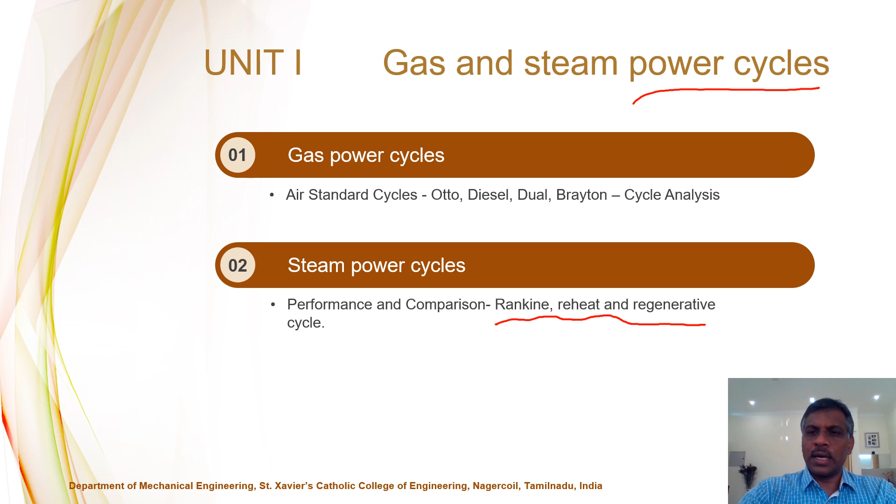Coming to air standard cycles, the basis of course goes to this most efficient cycle. It's an assumption, an ideal cycle. It's better to have that way, but there are a lot of practical difficulties in implementing the Carnot cycle. The Carnot cycle, if you review it, has 4 reversible processes. When it is reversible, it is very tough, but it is easy to remember this Carnot cycle in a TS diagram, temperature-entropy diagram, where it looks like a square. It is easy to always remember the Carnot cycle because that is the base, the best we can achieve—an ideal cycle for all power cycles.

There we have, as I mentioned, 4 processes: isothermal heat addition. Isothermal means constant temperature heat addition. You can see from 1 to 2, and it is horizontal in a T-S diagram. That means T1 equal to T2.

The second process is expansion, where we will get work. It is expanding, and it is isentropic, otherwise called reversible adiabatic. Isentropic means entropy is constant. In process 2 to 3, S is equal to constant, that means S2 is equal to S3. You can see it's a vertical line, so S2 is equal to S3.

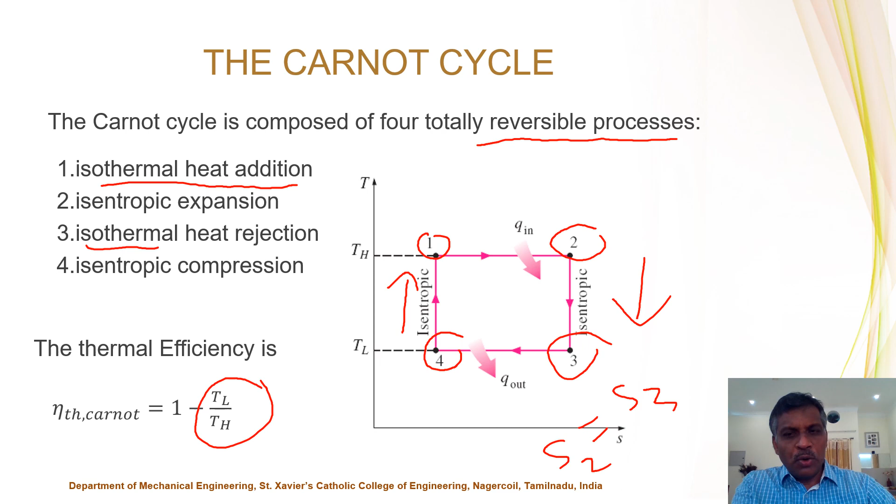So when it comes to air standard cycles, basically we assume air is the working fluid. As you know, air cannot be a working fluid for actual analysis purposes, but for theoretical analysis of IC engines, internal combustion engines, to derive theoretical equations for how the performance of the engine varies, we assume air standard cycles.

So you can see that in the actual case, actual IC engines, we supply air as well as fuel. Fuel may be either petrol or diesel or a gaseous fuel. You supply air as well as fuel to the combustion chamber, and it generates a lot of heat, and it expands, producing power, and the combustion product has to be thrown out to the atmosphere for taking fresh air and fuel for the next cycle. This is the actual case.

But our standard assumption is that we take only air, eliminating the fuel, and we are adding heat. Instead of combustion, we say that we are adding heat and air goes back. This is ideal in the sense, this is our assumption for air standard cycles. So instead of actual air and fuel, we take only air. Instead of combustion, we take heat addition. Let's see how it is.

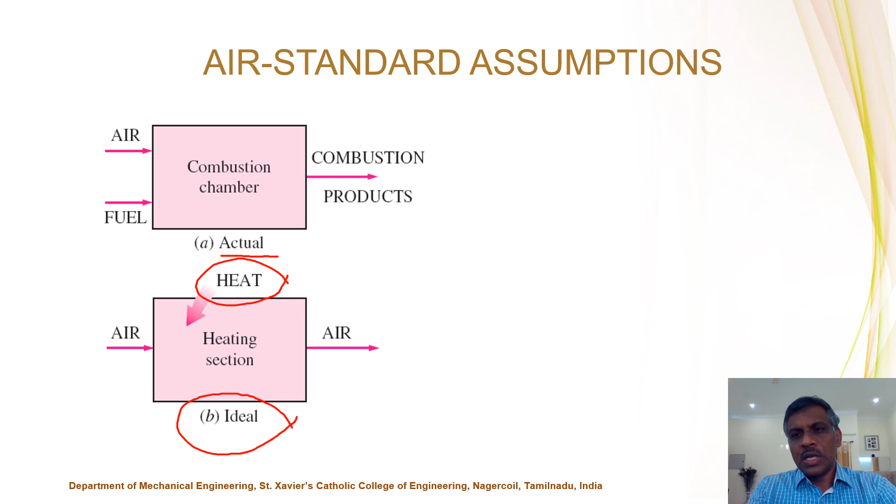So the basic assumption is we assume that the working fluid is only air instead of air plus fuel. And we assume that the air behaves as an ideal gas, which is why we can apply gas laws. And again, we assume all the processes involved are reversible processes.

You know how difficult it is to have a reversible process. A quasi-static process is a reversible process, a no-friction process is a reversible process. But we assume it as a reversible process. As I told in the previous slide, the combustion process is replaced with heat addition, and the exhaust process is replaced by heat rejection.

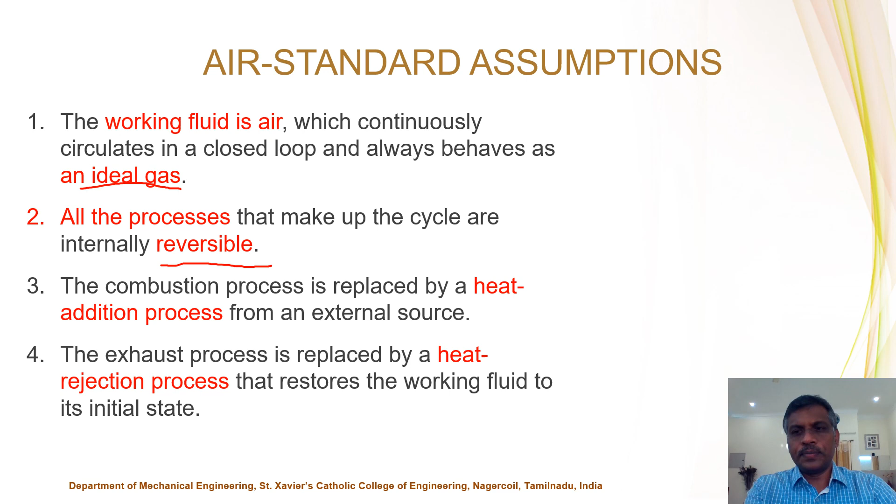Just to get a grip of it, we talk about reciprocating engines or IC engines. You know the major components are an intake valve and exhaust valve, and you have a cylinder and a piston where the piston can move up and down. The linear movement of the piston from bottom dead center to top dead center, we call it a stroke length, or stroke in short. The diameter of the cylinder or the piston, both can be called the bore diameter, or in short, the bore.

You can look at this diagram. Here you can see that as the piston moves from TDC to BDC or BDC to TDC, that volume is called the displacement volume, which we calculate as the cross-section area of the piston into the length of stroke. We say it is pi by 4 d square into L.

And you can see another term, which is also better to get familiarized with, the clearance volume. That is, when the piston has reached the top dead center, there is still a gap to accommodate the compressed air-fuel mixture, as well as the parts of the valves and other things.

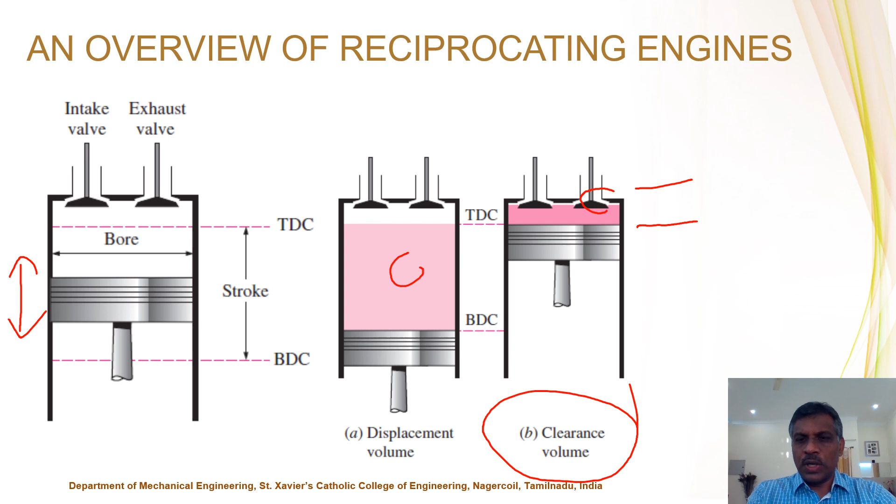So that volume we call it the clearance volume. These are the basic nomenclatures of ICs.

So Otto cycle, we'll call it the gasoline cycle, or petrol engine, which is otherwise called spark ignition engine, because the combustion is started by giving a spark. That is why we call it a spark ignition engine. Let us assume it is a 4-stroke SI engine.

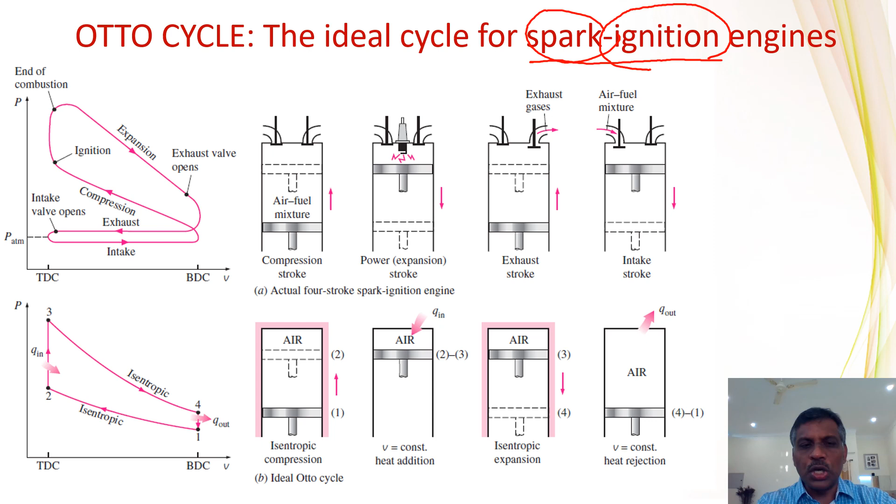In a 4-stroke SI engine, the top part is the actual case, and the bottom diagram talks about the ideal one. This is ideal and this is the actual.

Let us see the actual first, then come back to the ideal Otto cycle. Air and fuel are taken into the cylinder, and the piston moves upwards from bottom dead center to top dead center. Both the valves are closed here. And the air fuel mixture gets compressed.

Once it is compressed fully, a spark is given by the spark plug. Combustion starts. Expansion of air fuel takes place. It pushes the piston downwards. That is what we call the power stroke, or expansion stroke. Piston moves from top dead center to bottom dead center.

Okay, expansion. So initially we compress, giving work to compress it. Then we combust it, burn it, then expand it. And the remaining is the exhaust. We throw off all the burnt gases to the atmosphere, and the next cycle begins with the suction of air fuel. So this is approximated.

Assumed. You can see that intake and exhaust can be cancelled because they are almost in opposite directions. Intake is this direction, and exhaust is in this direction, so we can cancel it.

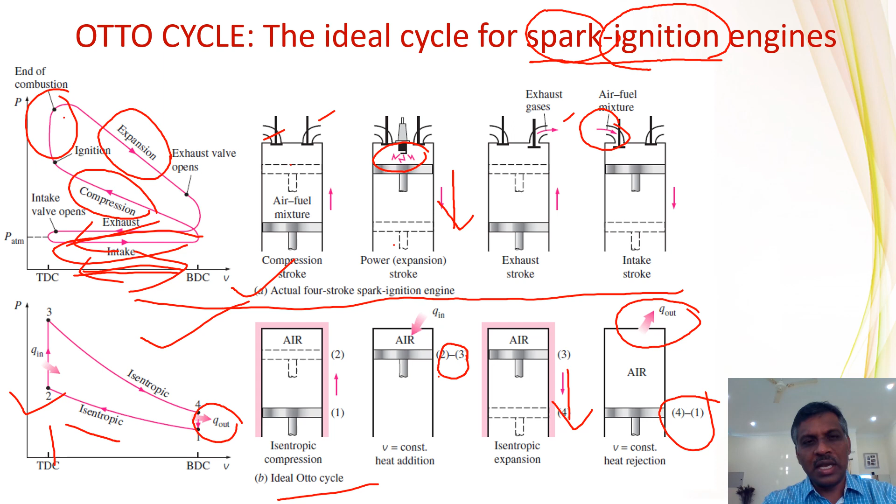Thank you. So this Otto cycle diagram, you should be able to draw it and remember it. Especially this PV diagram is very, very important. Here we understand it is constant volume heat addition, 2 to 3. This gives the name constant volume heat addition process of expansion. So constant volume is 2 to 3 here.

So we can see that V2 is equal to V3. That is why we call it a constant volume process. Here you can see it is V4 equal to V1. That is constant volume heat rejection.

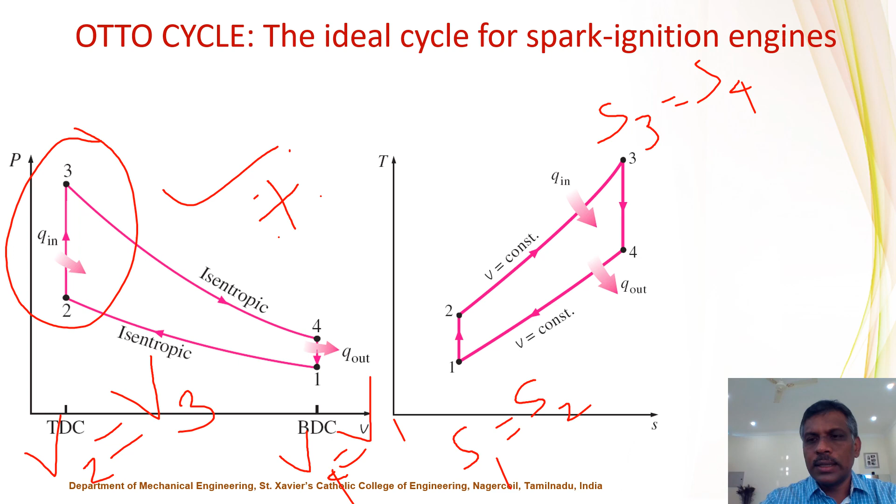Here, 1 to 2 is isentropic, so S1 is equal to S2, and S3 is equal to S4. This is what our PV and TS diagram of the Otto cycle is all about.

So the Otto cycle derivation is very important, very very important. They can ask this in the exams. So please recollect and study that. I'm not doing it here as a revision.

So the final equation comes as efficiency of Otto cycle equals 1 minus 1 by Rk to the power gamma minus 1. And Rk is the compression ratio, which is equal to initial volume by final volume.

It is the final volume, so in other ways we put it as V1 by V2. We say initial volume of the cylinder divided by the clearance volume left after the end of compression. From this equation you can understand that this term is very important.

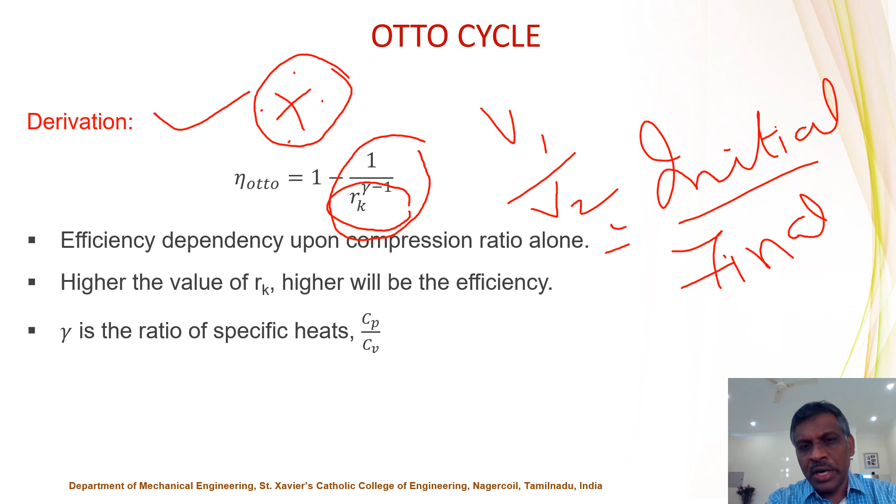In order to have this term at a low value, that is 1 minus something, the denominator Rk should be a high value. So higher the value of Rk, higher will be the efficiency. If Rk is higher, the efficiency will be higher.

That is the concept. Of course, gamma is the ratio of specific heats. So this is what we understand from the derivations: efficiency depends upon compression ratio, and higher the compression ratio, higher the efficiency.

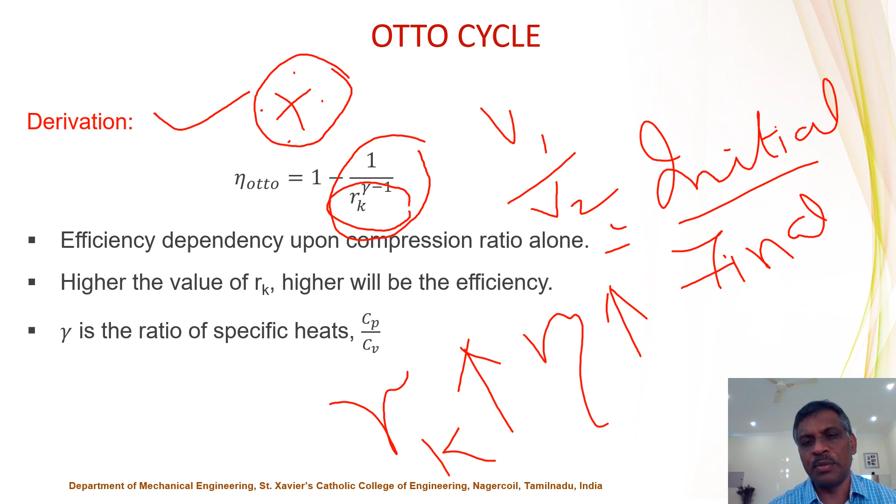But that has a limit. That is a theory portion in this unit, and they can ask it. So you say higher the compression ratio, higher the efficiency. So can we keep on increasing the compression ratio? That is a question that comes to mind. We wanted to improve efficiency, so let's keep increasing the compression ratio.

You know that Otto cycle compression ratios are low, around 8 to 12, whereas in the case of the diesel engine, because that is a compression ignition engine, it is around 20 to 24, which is so high.

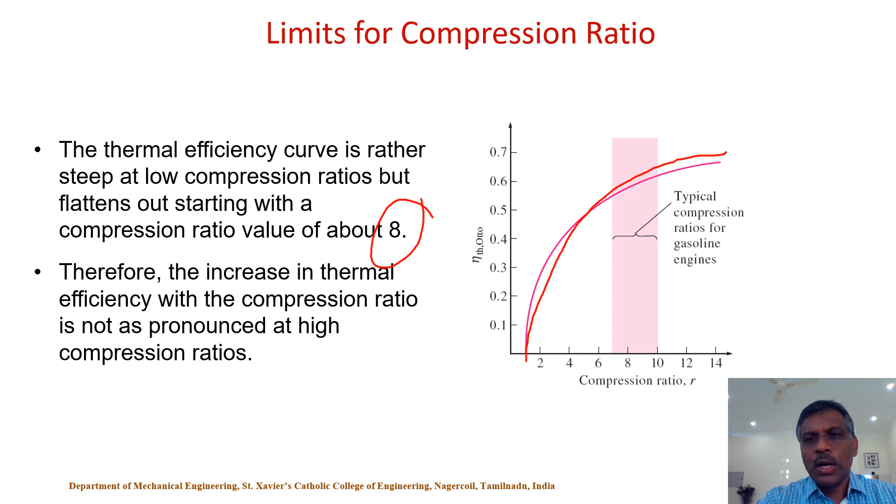We take the air-fuel mixture in the compression stroke in the actual case. If you take air and fuel together and compress it, the temperature will rise. And if the temperature rises above the auto-ignition temperature, automatically the fuel gets ignited, not in our hands.

Normally we ignite the fuel by giving a spark at an appropriate time. If the temperature goes high, it burns automatically, early, rapidly, and it creates a lot of noise - audible noise. It backfires. The piston, instead of moving forward, can return back, putting more load on the compression stroke. So this is called knocking, or auto-ignition, or detonation.

So this is abnormal combustion, different words. It is not normal combustion, it's abnormal combustion. So auto-ignition is not allowed. Auto-ignition cannot be tolerated because it hurts the performance and causes engine damage.

So there is an upper limit for the compression ratio. You cannot keep on increasing it. That is why the compression ratio for the petrol engine is low, it's about 10 or so. It is not increased as we like.

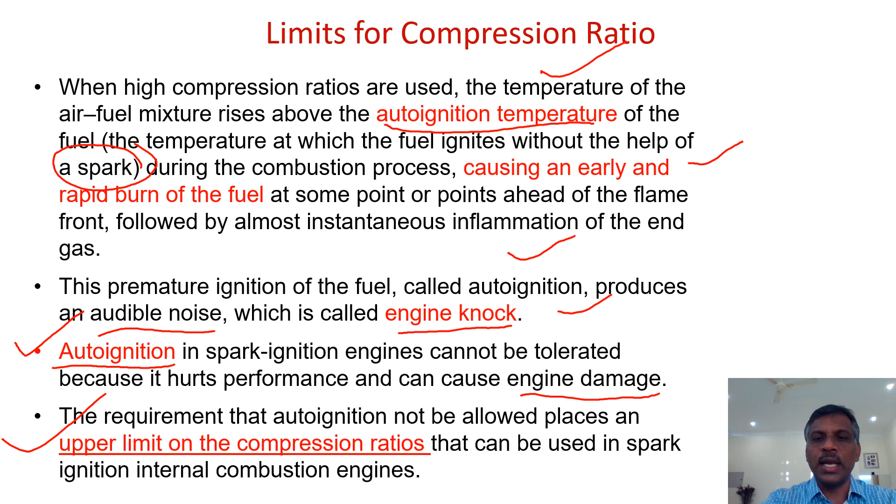So another term I wanted to introduce, I'm not going to explain much on it - it is the mean effective pressure. You know that pressure varies during the cycle. Mean means average, and the pressure keeps on varying here and there, but we try to put an average. This is what we call the mean effective pressure.

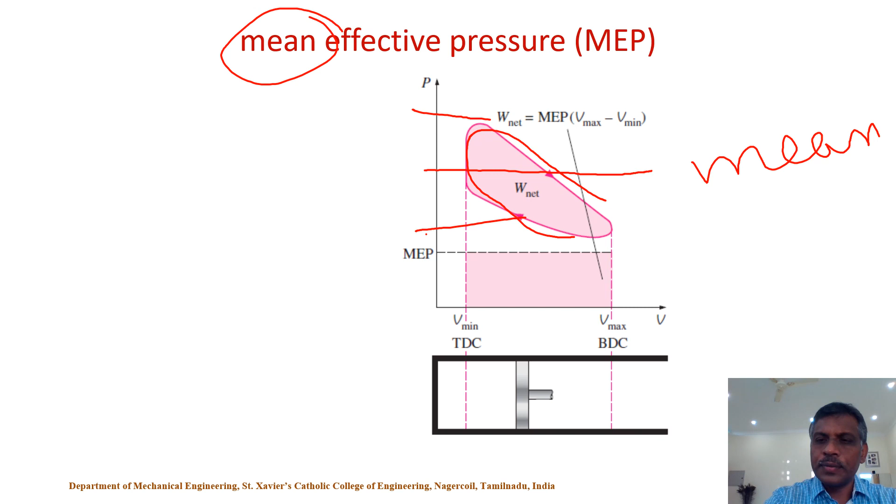So this mean effective pressure is a fictitious pressure, an assumed pressure. Fictitious means not real, but we assume it. If the pressure is constant like that, the amount of work produced, work net, will be the same if the pressure is maintained constant. So that pressure is called the mean effective pressure.

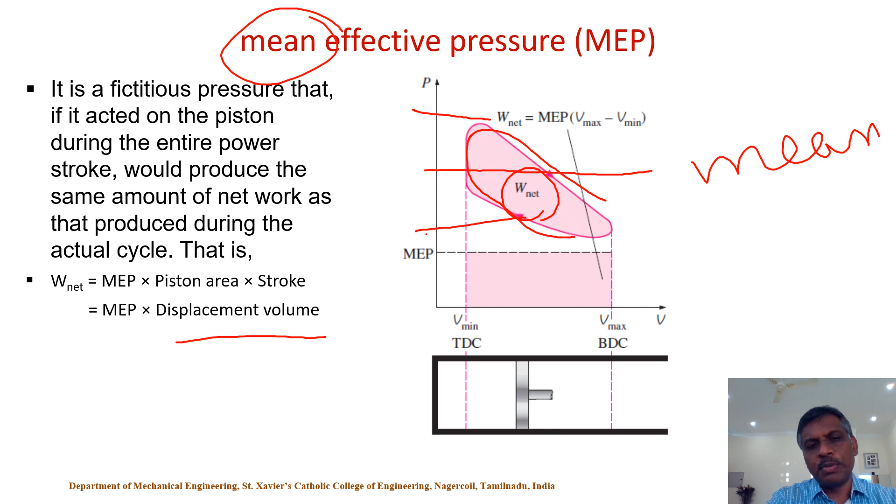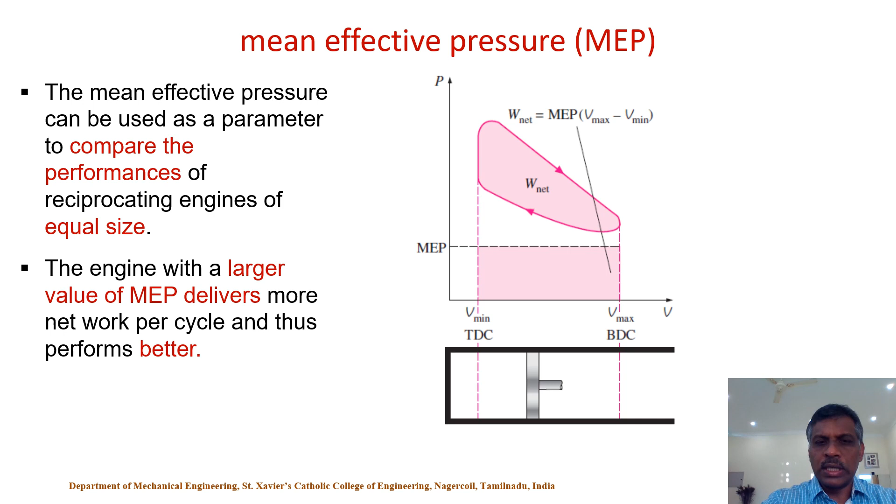If you know the mean effective pressure, then you can find the work net as the mean effective pressure multiplied by the swept volume or displacement volume. This mean effective pressure can be used to compare the performance of different engines. Larger the mean effective pressure, more work we can obtain in a cycle, and better the performance. That is how they evaluate it.

Coming to the next cycle, we have some set of problems to be done in the Otto cycle also. Then there is the diesel cycle. The major difference between the Otto cycle and the diesel cycle - always remember, Otto is gasoline, gasoline is petrol, Otto. So in the diesel cycle, air-fuel mixture is not compressed together like that.

Air fuel mixture is compressed - that is a major difference. And you have a spark plug.

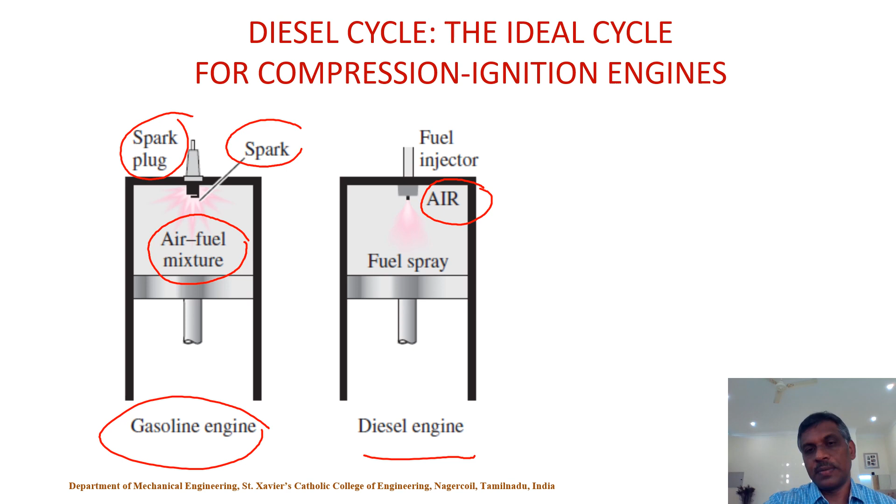When it comes to diesel engine, only air is compressed and fuel is injected later. You don't add compressed air plus fuel together, so the problem of auto ignition is not there in diesel, because we take only air. You can compress it as much as possible, if the cylinder, piston and other parts can withstand it. Because you are compressing only air and adding fuel at a later stage, there is no issue of auto ignition, knocking or detonation in diesel engine. That is a major difference.

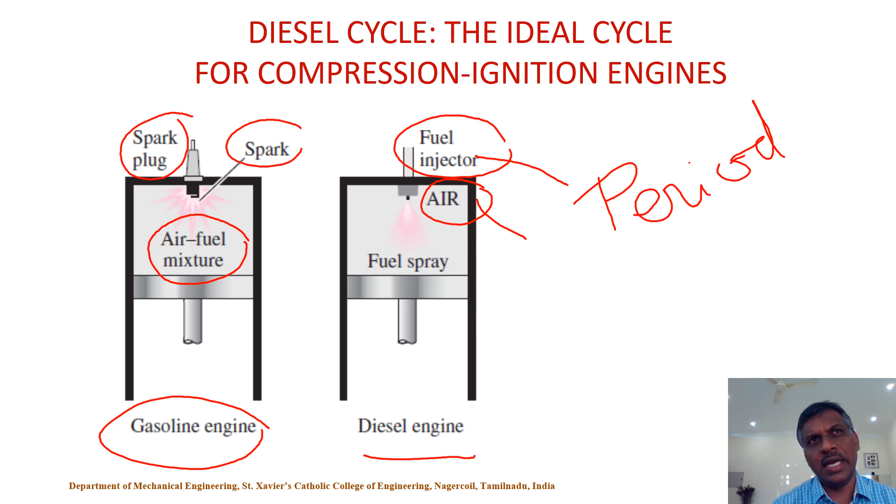Fuel injection has a period, there is a duration to it. Whereas in the Otto cycle, we say combustion is instantaneous. That is why we say it is constant volume.

So you have, as I told, a period of fuel injection, from point 2 to 3. That is the only difference between the Otto cycle and diesel cycle theoretically. If you look at the PV diagram, you can see that 2 to 3 is a flat, horizontal line, not a vertical line. Vertical line represents constant volume, this is a flat line.

Flat means you can understand that pressure is constant. P2 is equal to P3. So it is a constant pressure heat addition, as there is a duration of fuel injection, not instantaneous as we see in the Otto cycle or petrol engine.

The similar diagram you can see is the TS diagram, where P is constant and other things remain the same. 1 to 2 is isentropic, entropy is constant. 3 to 4 is again isentropic, where entropy is constant. Only difference is 2 to 3 is constant pressure. Of course, heat rejection 4 to 1 is again a constant volume process, as we have it in the Otto cycle.

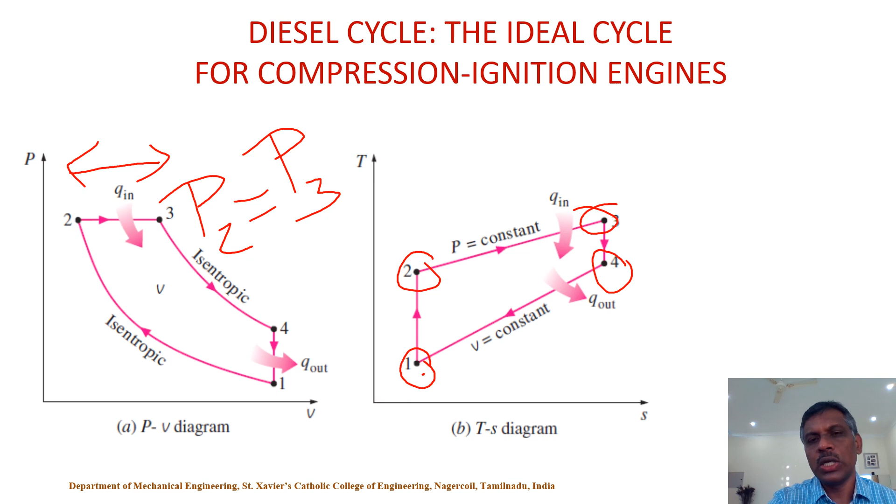So here when you compress, as I told earlier, you can have a higher compression ratio, and it has a longer period, so it is possible to have constant pressure heat addition. So this cycle, the diesel cycle, is otherwise called the constant pressure cycle. The Otto cycle is called the constant volume cycle, because heat addition takes place at constant volume.

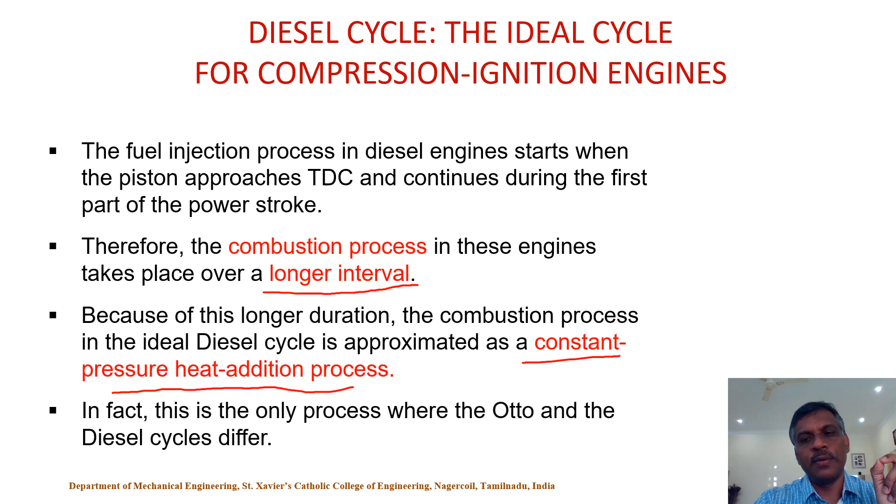Here it is constant pressure. That difference you should always remember, because when you take the derivations, when you do the problems, you have to be very careful. Heat addition is at constant pressure.

Dual cycle, dual means two, it's a combination of Otto and diesel. Why we do it? That is a better approximation for the actual case, better approximating the combustion process in a better way. So it starts with constant volume, then you have constant pressure. So it is both constant volume and constant pressure heat addition. That is quite realistic, coming closer to the actual case.

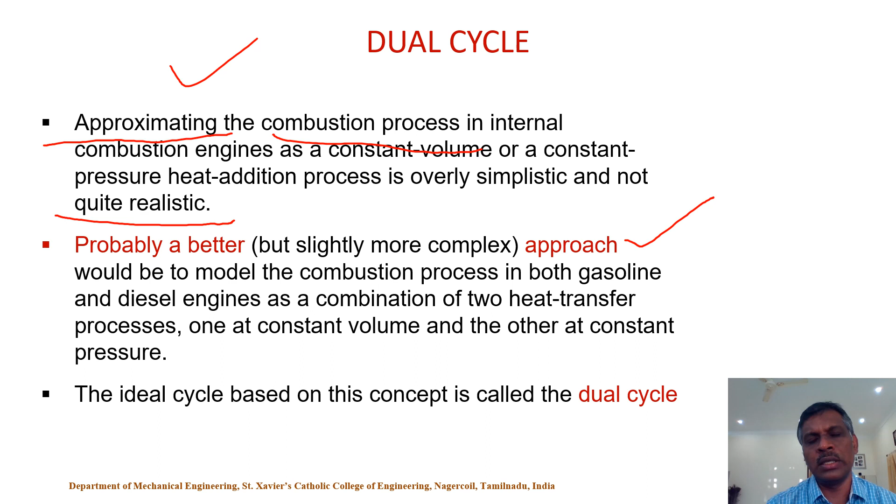So this is like a diesel cycle or a gasoline cycle combined, it is called a dual cycle. It is a combination of constant pressure and constant volume. You can see that 2 to x is constant volume, x to 3 is constant pressure. If you put 2 to 3 together, heat addition is both constant volume and constant pressure. That is the difference between the diesel cycle and the dual cycle.

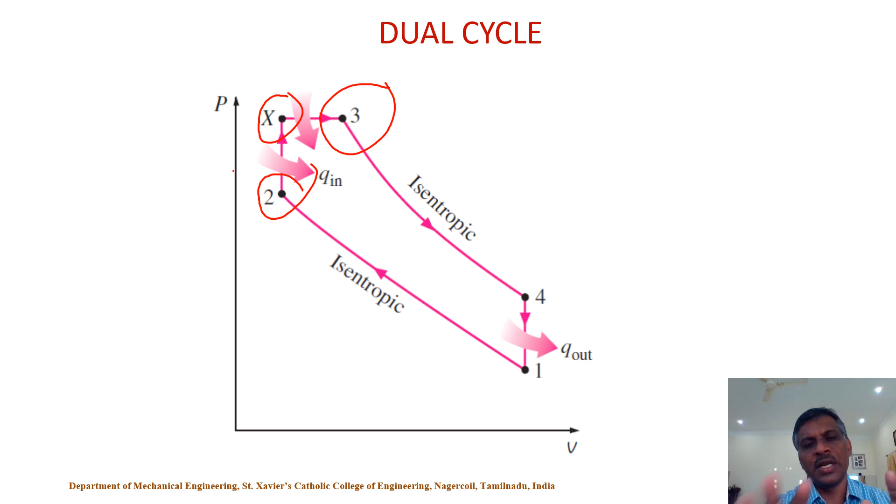I hope you understand the three air standard cycles. Otto is constant volume, diesel is constant pressure, and dual is a combination of constant volume and constant pressure. In the next video or next PowerPoint, I would like to solve problems in Otto, diesel and dual cycles for you to understand better.